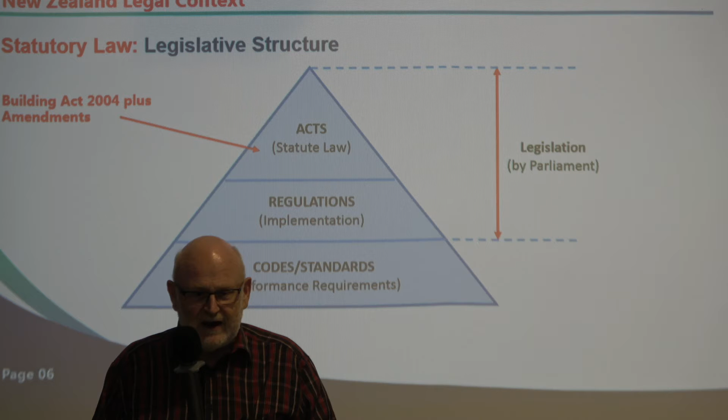So in terms of the Building Act 2004, it sits at the top, plus amendments. Almost every year there are amendments that are made to these acts, they get changed. So while the substantive act, the main act, still stays in place, 2004, it has had multiple amendments through the years. The building regulations are ones that still apply, 1992, but they have largely been superseded, though they still sit in place. And the codes and standards is what you have to work to, which is the building code.

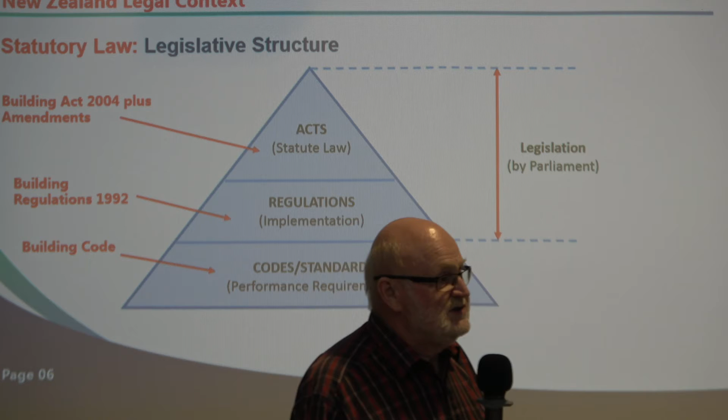So this is how the structure works: we have the Act at the top, the regulations, and then the codes that sit underneath it. In our case, the building code.

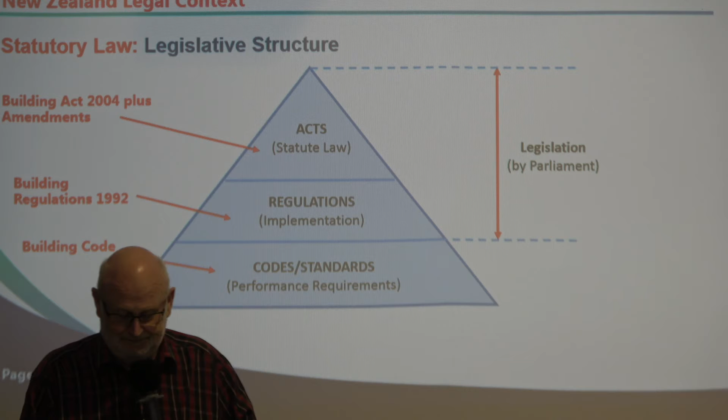So that's statute law. We'll just quickly look at common law, and we get down to legal terms now. So common law, tort - this is a strange term - but tort is common law where you have done something wrong to another person, a civil wrong. It causes the claimant, that might be me, to suffer loss or harm, resulting in legal liability to the person who commits the tortious act. So this is common law and the law of tort, where you are caused harm.

The tort can cover intentional negligence, financial loss, invasion of privacy, and many other things. So if you are negligent in your actions, you may find that you have civil proceedings taken against you under the common law of tort.

In tort law, the purpose of any action or lawsuit is to obtain a private civil remedy, such as damages or financial compensation. If I'm going to claim that I have suffered loss, you have to be able to establish that it was caused by you. Okay, so that's common law.

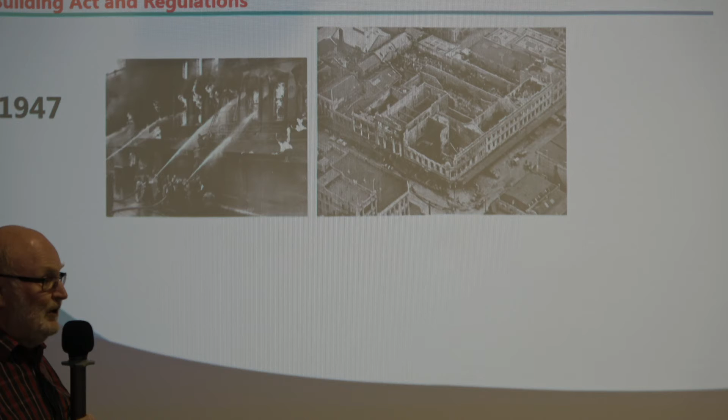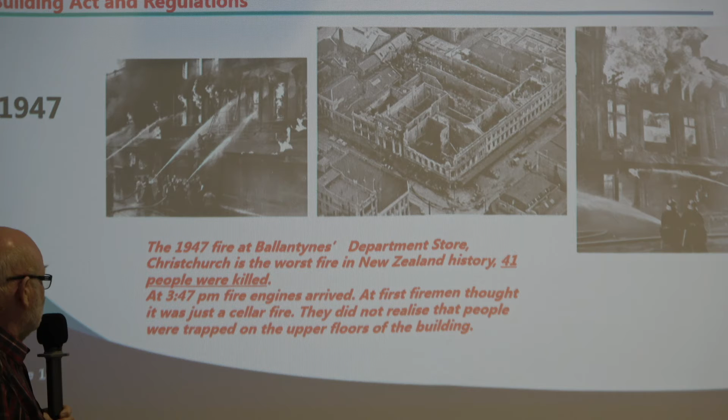If we go forward a little later, to 1947, it's probably one of New Zealand's most serious fires, in a department store in Christchurch. Once again, the building was completely destroyed. 41 people were killed in the fire. Firemen thought it was just a cellar fire; they didn't realise there were people trapped inside. So a very significant part of our New Zealand building code now is about protecting life and protecting people in case of a fire. It is about the protection of life, not necessarily the protection of the building, but the protection of life.

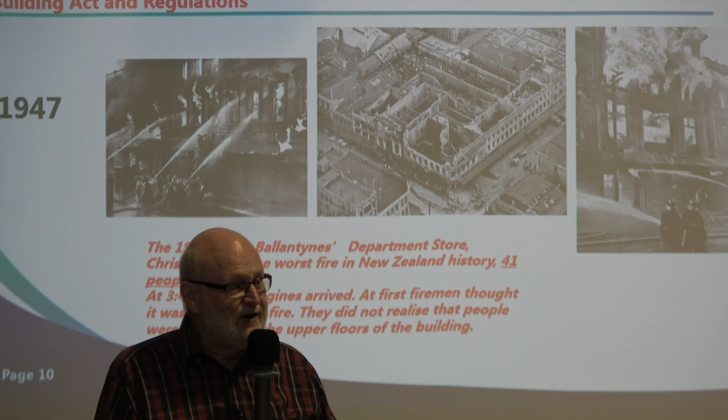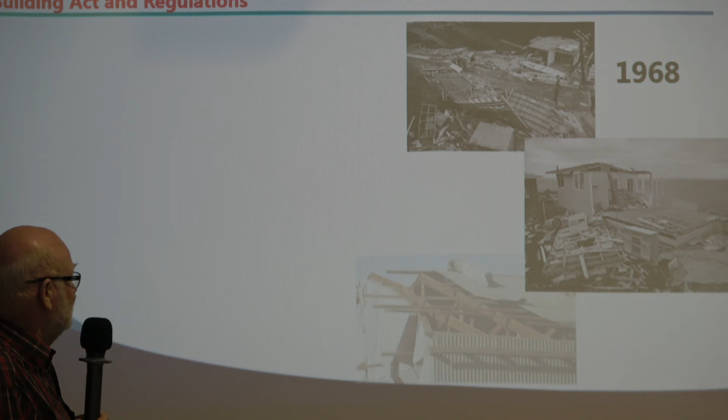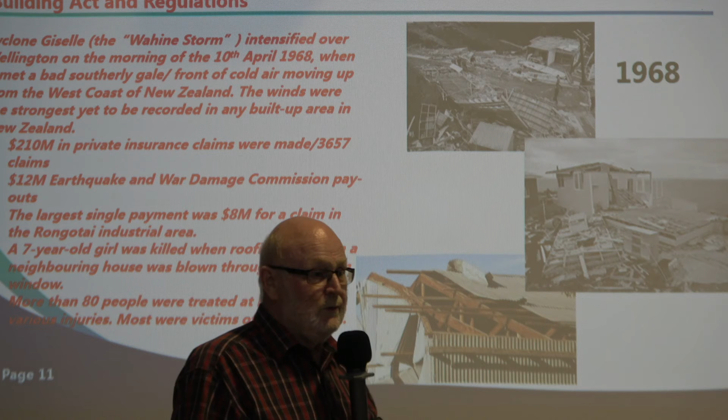Going forward a little further, this is in my memory, 1968. Buildings were completely destroyed and flattened by wind. This was the so-called Wahine storm in Wellington. The Wahine was a ship, a ferry, that went between Wellington and Christchurch. It sunk in Wellington Harbour, it hit the reef coming into the harbour, and then the wind blew it into the harbour and it sunk, with 57 people drowned. But the Wahine storm is generally recognised as one of the most significant storms that have hit New Zealand.

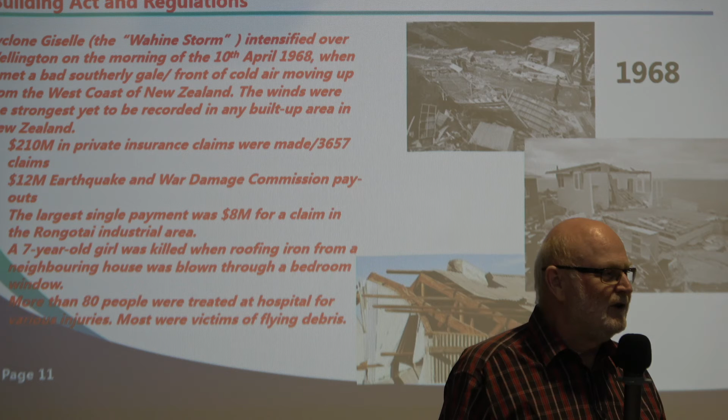The buildings blew apart. The buildings weren't connected: the roofs weren't connected to the top plates, the top plates weren't connected to the studs, the studs weren't connected to the bottom plates, the bottom plates weren't connected to the floor, and the floor wasn't connected to the foundation. It all blew away.

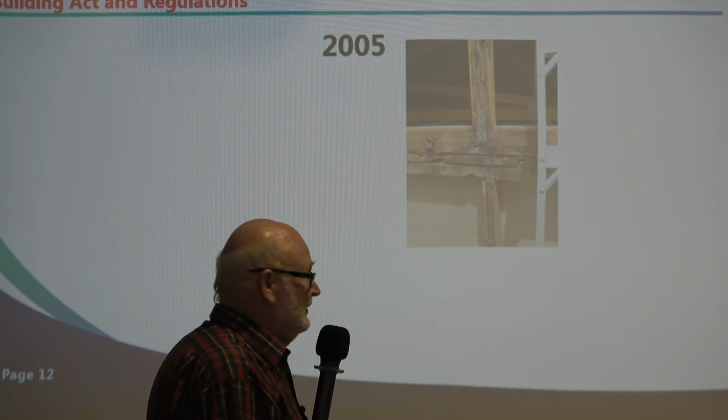Then, even more recently, 2005, another issue came up: weather tightness. This sets the immediate context for a lot of our building code and building act, weather tightness issues. Relatively new buildings were not weather tight and they started to rot. In New Zealand, how do we build houses? With timber framing. One of the few countries that uses timber framing to quite the same extent. There are only a few countries like North America, the US, Canada, that use timber framing. It's very hard to see a timber frame house in China.

One of the issues, or there were several, but a significant one was the use of untreated timber. The research said that if you kept the timber dry, it was okay, it didn't rot. Well, that seems logical, doesn't it? If you keep the timber dry, it won't rot. So the use of untreated timber was adopted, and possibly for very good reasons, like environmental reasons. The use of treated timber involved chemicals with environmental impacts, and people handling treated timber had health issues. So there were some advantages to not using treated timber.

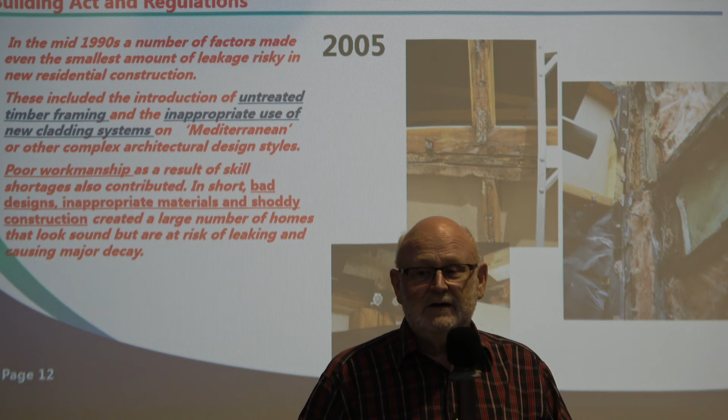And it's looking at junctions and joints in buildings, because that's where the water generally gets in.

So we had all of these events, and we talked about 1931 and the earthquake in Napier, but along came 2011 in Christchurch.

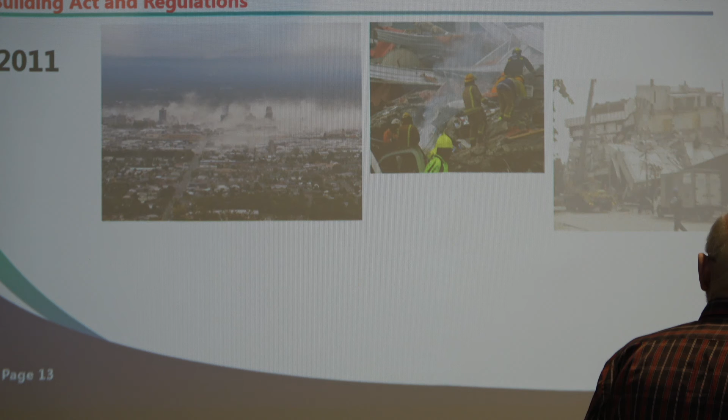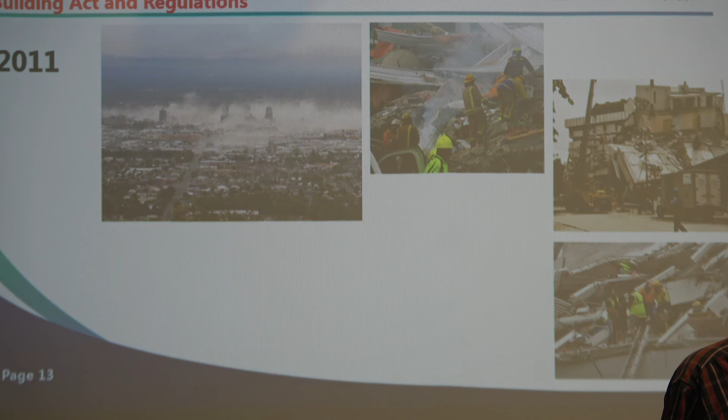2011, another earthquake came. The building collapsed. 185 people were killed, mostly in that one building. Now that one building is still subject to legal process, where Engineering New Zealand has been instructed to continue to take proceedings against the design engineer. They've been instructed by the Court of Appeal, I think it is, to commence proceedings.

So this building collapsed because of inadequate design. You can see it's a very classic example of a structural failure. The floors just pancaked, as they say - they just fell on top of each other. The connections of the floors to the columns and the shear core weren't strong enough, and they just collapsed on top of each other. 120 odd people were trapped in that building.

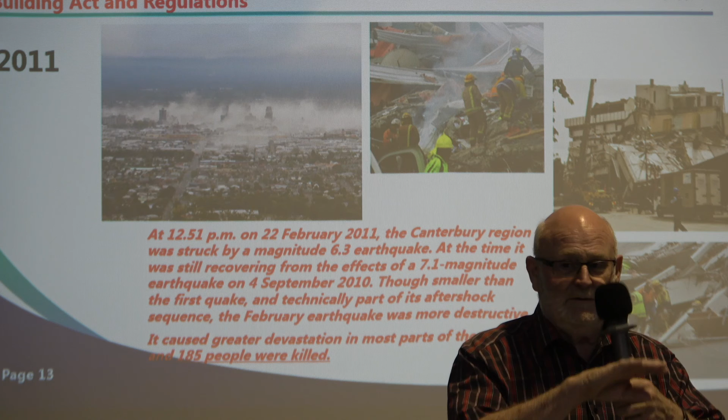The significance of the 2011 earthquake has meant that we have changed our design codes. That 2011 earthquake had significant vertical acceleration. The previous earthquakes, and our understanding of earthquakes, was about horizontal acceleration - the ground shakes like this. In that 2011 earthquake, the ground went up and down. So completely different set of forces on the buildings.

So the Christchurch earthquake has meant significant strengthening of buildings has occurred or is occurring in New Zealand. So all buildings now have to meet a percentage of the current earthquake code. So if you've got an old building out there in Onehunga, you may have to strengthen that to 35% of the new code. And if you can't strengthen it to 35%, you demolish it. So there's a timeline on that.

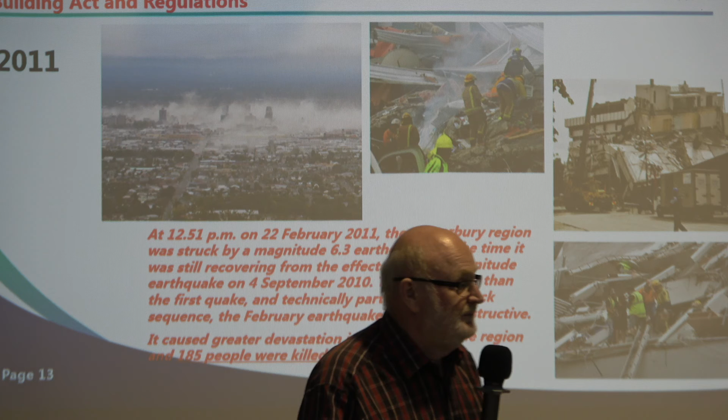So these are major events that have shaped our thinking in terms of building code. So the purpose of the Building Act is to provide regulation of building work, the establishment of a licensing regime, and the setting of performance standards.

One of the issues with leaky buildings was that there were many, many unqualified people putting buildings together, with little understanding about what they were doing. So that has meant that we've now introduced a licensed building practitioner scheme. So maybe it's your aspiration to become a licensed building practitioner. Anyone here is a licensed building practitioner? Okay, well done, congratulations.

All work must meet certain standards. Standards are set out in the Building Act legislation and regs, and determine how the work can be done, who can do it, and ensure that there's a system of checks and consumer protection. So if I'm buying a house from you, I have some protection. That's the purpose of the Building Act.

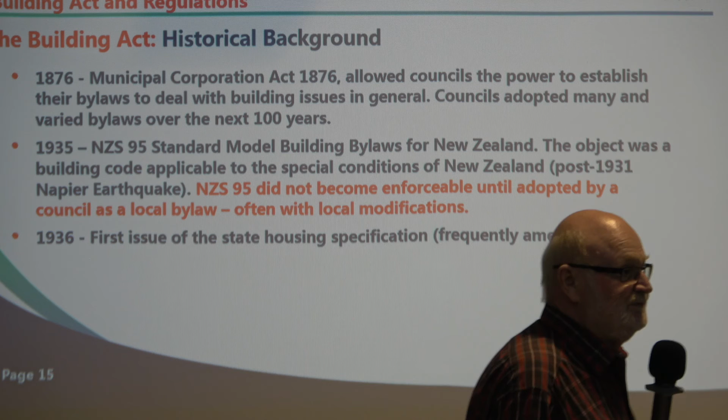The Labour government was elected for the first time in 1935, and they set about building lots of houses - just exactly what we're doing now in New Zealand, trying to do. They developed their own specification of how these houses were to be built. If you look at many of the state houses, if you drive through Mount Roskill for example, you'll see these houses built in the late 30s, early 40s. They are still there, still serving their function, but they were built to a standard specification.

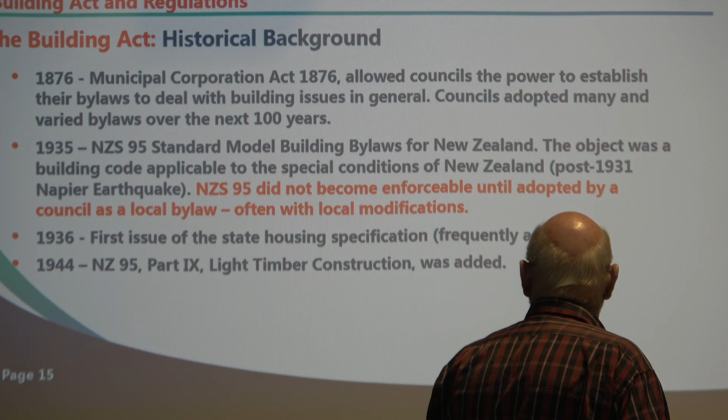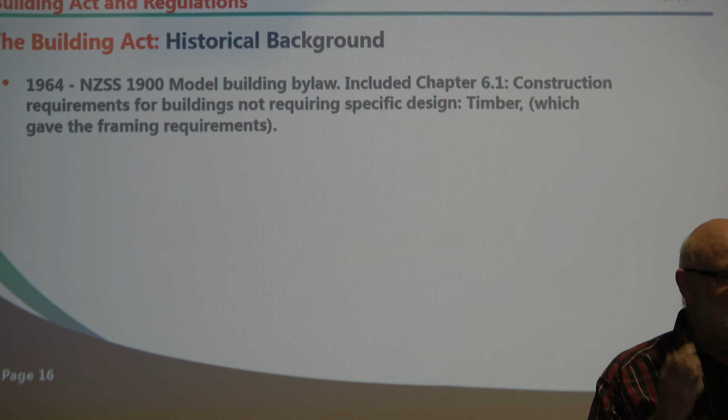In 1964, another new model bylaw was introduced, NZSS 1900, and in particular Chapter 6.1, construction requirements for buildings not requiring specific design. That was the predecessor of NZS 3604, which you're all familiar with to some extent - the current timber framing code. NZSS 1900 Chapter 6.1 was the predecessor. How, just out of interest, NZS 3604 2011 - how many pages?

Okay, I don't know how many pages, it goes to 300 pages now, that's standard. NZSS 1900 was 30 pages long, 30 A5 pages, small pages. You could just about do anything you liked.

And once again, this is in my lifetime. I've used this code to design and build buildings. This was a time in Auckland where there were 40 local authorities, 40 councils, and they were all interpreting NZSS 1900 differently.

I've in the past had many arguments with building inspectors. I had one inspector say to me, 'That's just the way we do it in Henderson.' But I said, 'You're the only place in Auckland that does this.' 'Oh yeah, that's okay, that's the way we do it in Henderson.' Literally, from one side of the street, you could have different requirements. It was a terrible situation to work in.

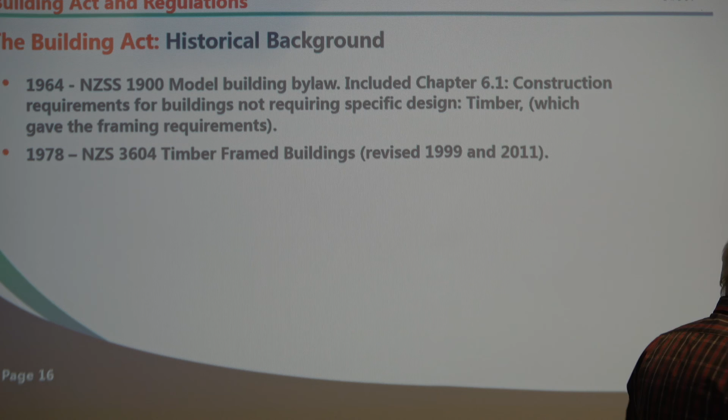So, in 1978, NZS 3604 was introduced. This was a common standard that was to be adopted by all councils. It was a major revision in 1999 and again in 2011. It got thicker and thicker.

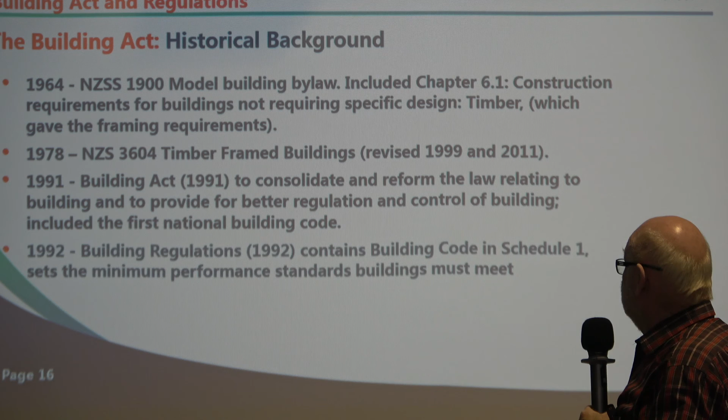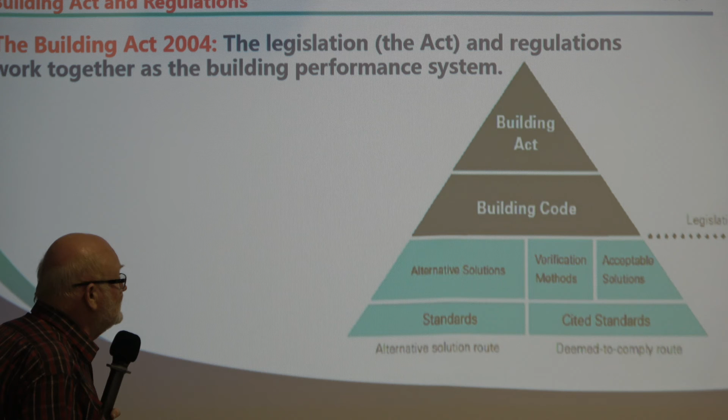In 1991, the first Building Act was introduced. In '92, the regulations to support the Act's implementation. Once again, just to show how this works, the pyramid of legislation: the Building Act, the Building Code, and the standards.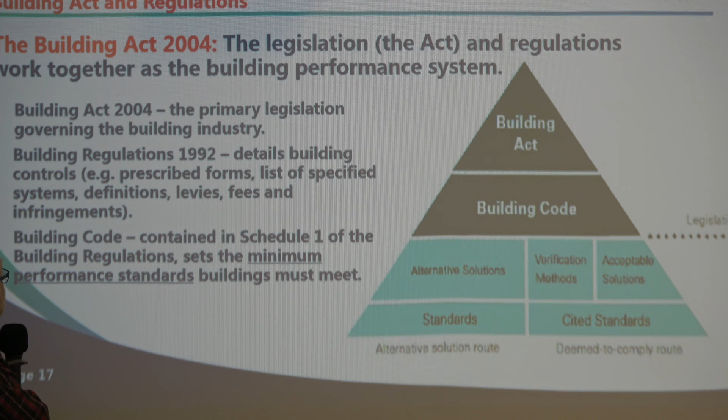In 2004, now it's the Building Act, which is the primary legislation governing the building industry. The 1992 regulations are still in place, but they've been heavily amended. The Building Code is contained in Schedule 1 of the Building Regulations and sets the minimum performance standards. That's something you'll be becoming very, very familiar with, the Building Code.

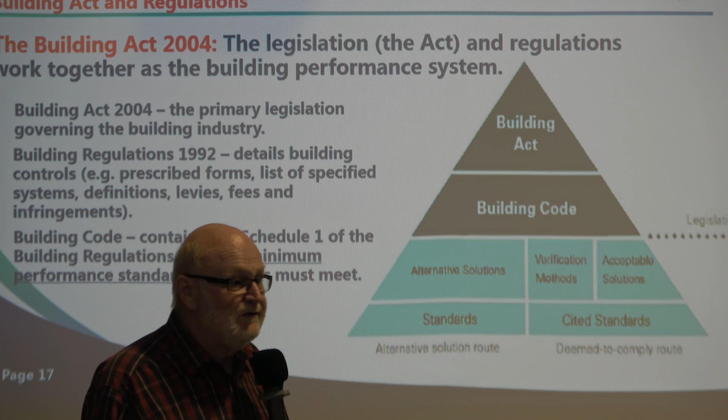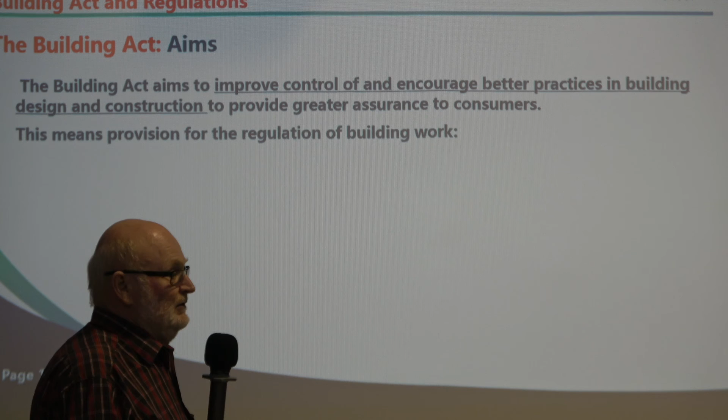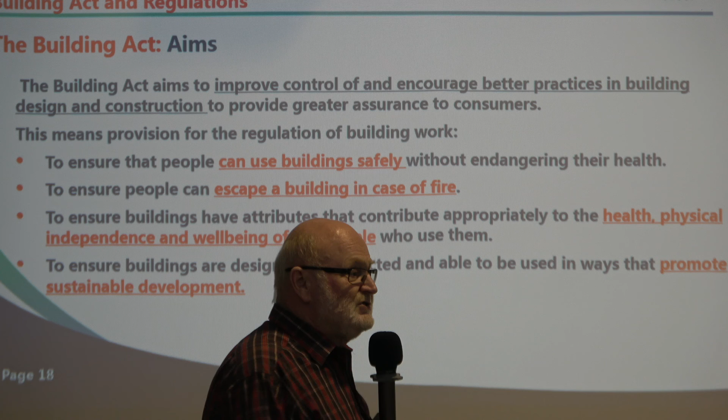So the Building Act aims to improve control and encourage better practice. This means the provision for the regulation of work to ensure that people can use buildings safely. Remember, one of the issues is getting people out of buildings, but it's also about using buildings safely, about protecting people so they can escape in case of fire. It aims to ensure buildings contribute to the health, physical well-being, and independence of people - we have disability provisions we now have to include, particularly in public buildings. And we also have issues to promote sustainable development. Those are the aims of the Building Act.

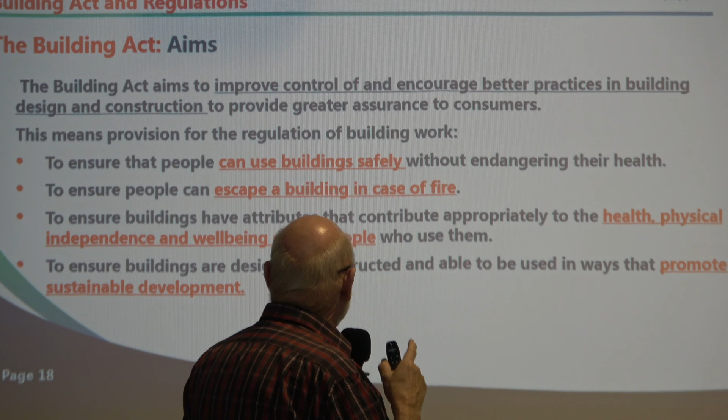To ensure people can use the building safely, to ensure people can escape in case of fire, to contribute to the health, physical independence and well-being of people, and to promote sustainability - those are the aims of the Building Act.

In terms of application, the Building Act applies to all building work, alteration, demolition or removal. There are some exceptions. For example, a small garden shed, 20 square metres, very small, or a structure less than 1.5 metres high, or a pergola or sunscreen structure don't require a building consent.

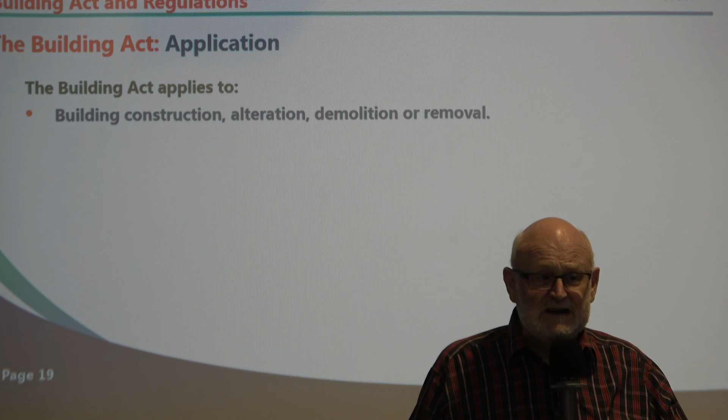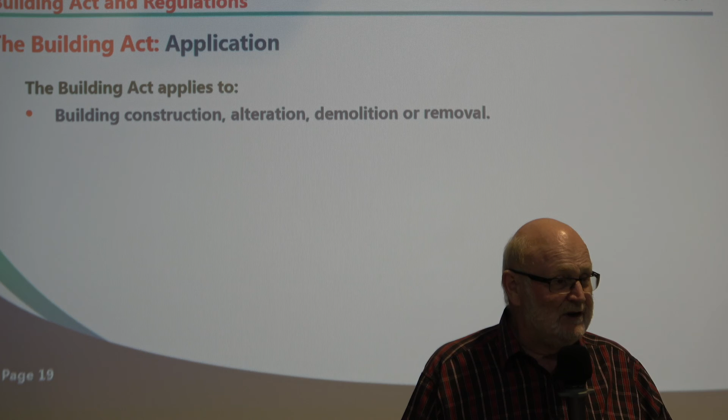Some maintenance work doesn't require a building consent. So if you're doing repair work on a house, as long as it's limited - you're replacing some of the exterior cladding, not all of it - or the maintenance is repairing an element that has lasted over 15 years, you don't need a building consent. But generally all building work, alteration, demolition and removal requires a consent.

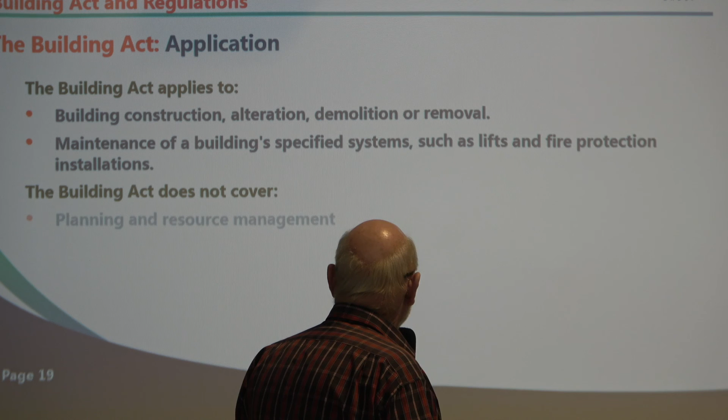Also, a consent is needed for the maintenance of systems within buildings, such as lifts and fire protection - these are in commercial buildings, and where you're going to do alterations to these things, they need a building consent. The Act doesn't cover planning and resource management - that's covered under other legislation. And it doesn't cover occupational health and safety - that's also covered by other legislation. So the Building Act applies to building construction, alteration, demolition or removal of buildings.

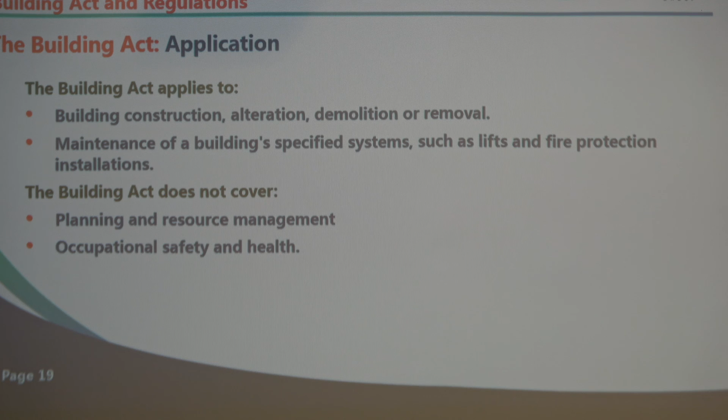Your responsibility - owners, designers, builders - you are, I presume, going to take the role of being a builder. Builders and building consent authorities are accountable for their role in obtaining consents and approvals, ensuring plans and specifications for building work meet the Building Code.